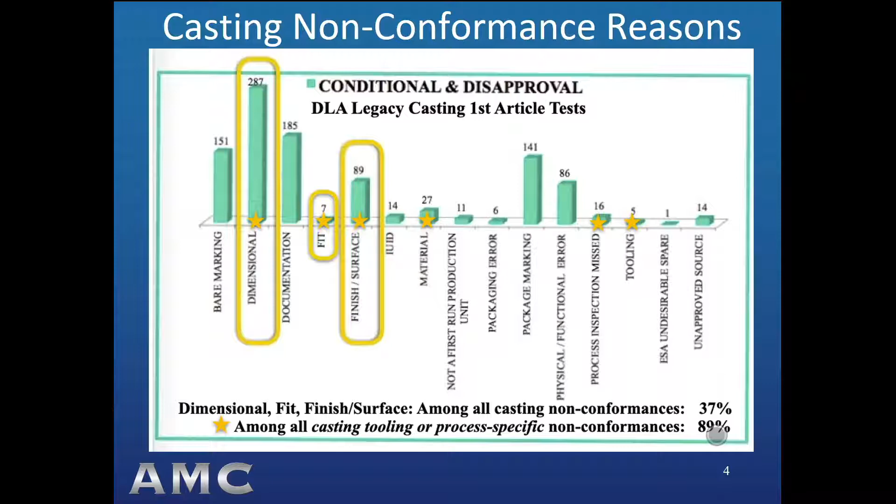Let's investigate why. The major and most difficult to solve problem in making casting dimensions comply with tolerance specification is the phenomenon I call pattern maker's contraction, commonly referred to in metal casting jargon as the shrink rule. When materials solidify from liquid, most of them, including all metals, form a crystal structure that's smaller in volume than the atomic arrangement in the liquid.

This is different from solidification shrinkage, so that's why I prefer to call the phenomenon pattern maker's contraction to avoid confusion in terms. Interestingly, ice expands to a larger crystal structure than the atoms of liquid water, and that's why ice cubes push up out of the ice cube tray and are larger. Well, the opposite phenomenon occurs with metals in casting molds. The metal wants to get smaller and the mold pushes back.

As the crystal structure is formed, the dimensions get smaller, pulling away from mold walls and often causing distortion as the mold pushes back in local areas. So the consequences of shortening dimension lengths is difficult to predict, but it gets worse.

This is research done in our American Metal Casting Consortium, funded by the Defense Logistics Agency and conducted by Penn State.

What we see here is the contraction rate based on feature length on the x-axis. Just look at the variation from contraction, which we expect, to some expansion, which we wouldn't expect, but the overall nominal rate is 2.1% for carbon and low alloy steels, which is what these experiments were conducted for. But in this case, we actually got 1.6%.

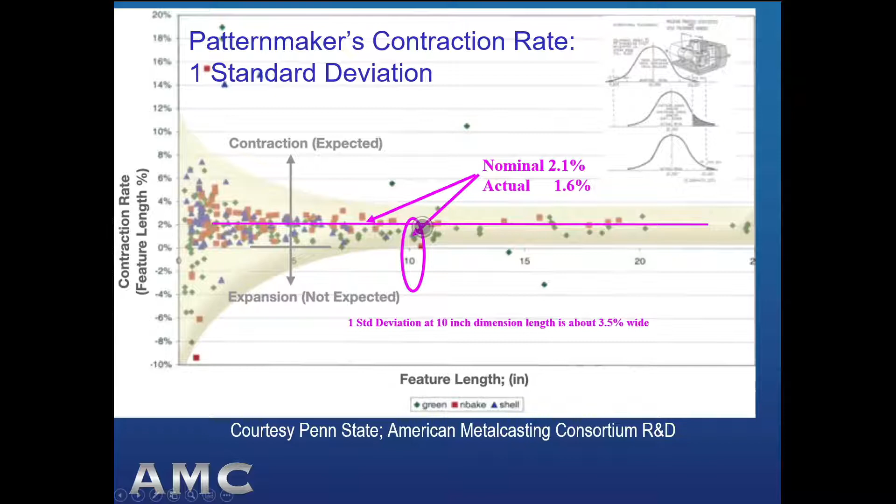So you can see that even as a longer dimension where the one standard deviation gets smaller, we still have significant variation. The consequence of this wide variation in pattern maker's contraction rate is difficulty in centering dimensions within their specified tolerance range. Here we have a 10-inch dimension, and the tooling was built for this casting.

We used an expected 2.1% pattern maker's contraction rate, but only got that 1.6% rate that I highlighted on the prior slide. So our process is capable of meeting the dimensional tolerance band specified, but our center of the dimension is off by the amount of the error in pattern maker's contraction estimate. Consequently, some of the castings are outside of specification, not because the process wasn't capable, but because the dimension wasn't centered, because we missed our pattern maker's contraction guess.

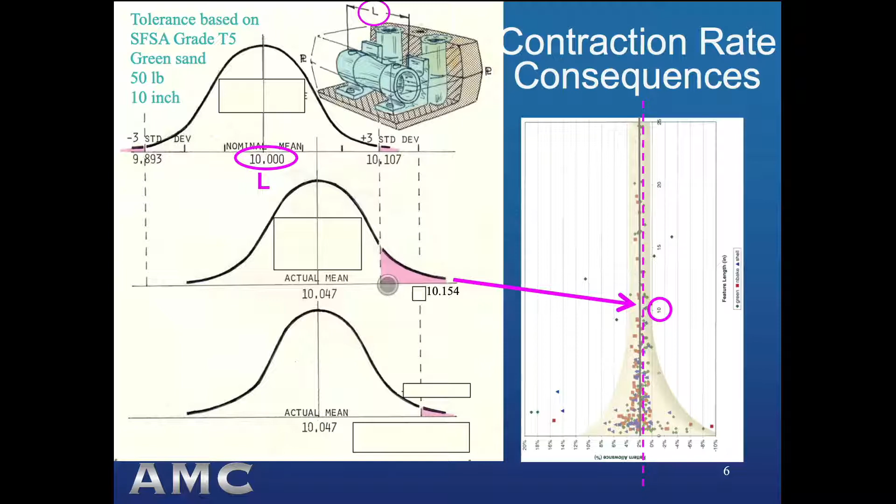So pattern maker's contraction rate is a guess made by the mold cavity tooling builder, and the data shows why that guess is problematic, and why dimensions are so difficult to achieve correctly in the first article inspection. But that data with all the variation was just for one metal alloy family, the carbon and low alloy steels.

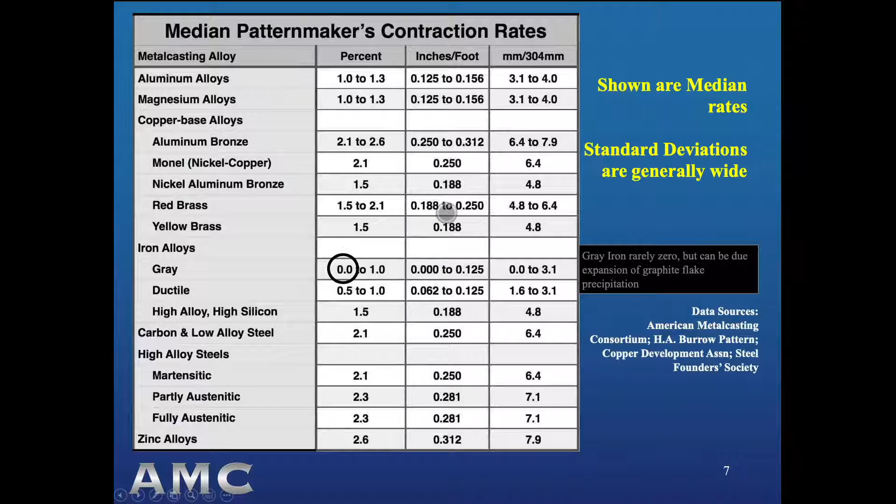Look here at all of the many metal casting alloys, and look at the difference in the center column, which is the standard parameter, inches per foot of contraction, and just look how much the median rate for each of these alloys differs. When I was making castings, here's a chart that I used to help me and my mold cavity tooling builder collaboratively make better pattern maker's contraction rate guesses.

If we missed, we missed. We would have to fix the tooling and make new prototype castings to see if we did fix it, but we tried, and at least we thought about it carefully.

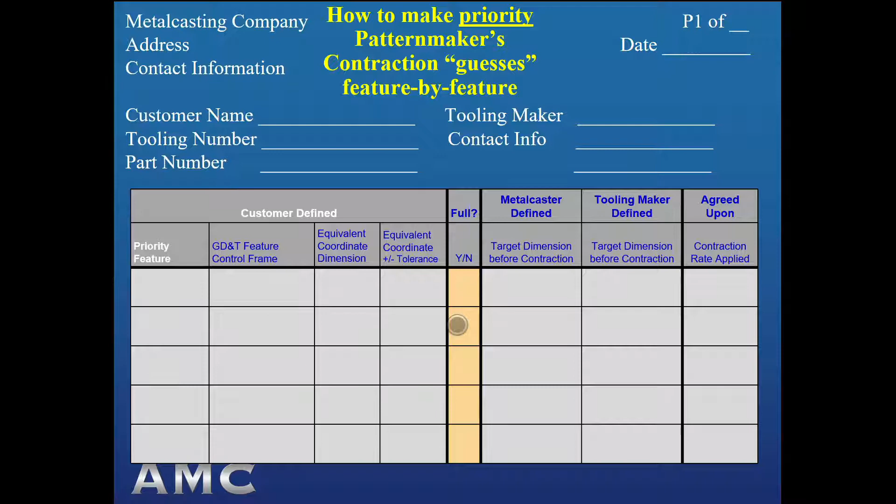Now look at this center column labeled full, marked in light orange. Full means that after we chose the contraction rate, we built the tooling on the large side of the dimensional range. For risky dimensions, that meant that when we missed the contraction rate, which we sometimes would, all we had to do was remove some tooling material to fix it. With metal tooling especially, having to add small amounts of material to the tool is a disaster for tool life.

The next most significant variable in the control of dimensional tolerances, but much more controllable, is mold degrees of freedom - in other words, freedom of movement in the assembly of the mold cavity. Most casting molds are assemblies of mold halves, cores, chills, and perhaps printed mold elements from additive manufacturing, but not all molds. Some are close to monolithic, most notably investment castings and sometimes die castings and lost foam castings.

As we will see in an upcoming slide, even those mold cavity making processes can have degrees of freedom that affect dimensions, but not as much freedom relatively speaking. Here we see a typical situation in a horizontally parted sand mold.

Encircled is a tall core that is set in the bottom half of the mold. It has 2 degrees of freedom in the green horizontal box. It has a core-to-mold degree of freedom as that core sits in the bottom half of the mold, and it has a degree of freedom across the mold parting line as it goes across that parting line and connects with the top half of the mold.

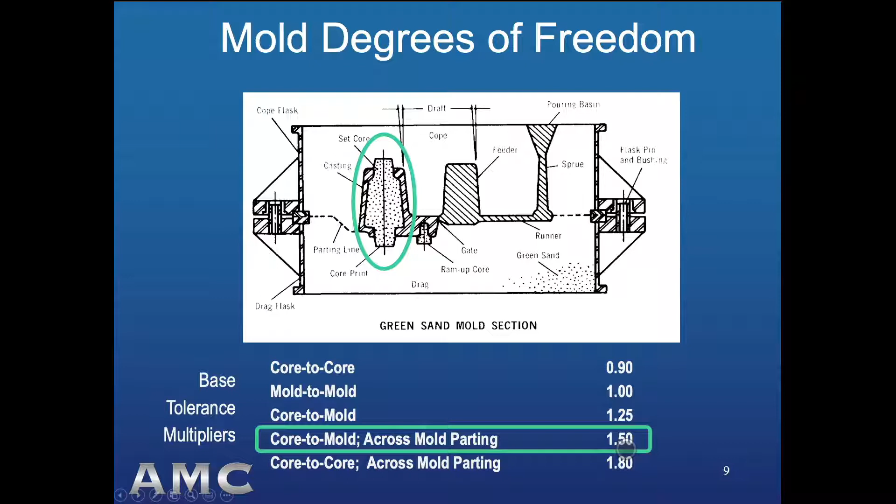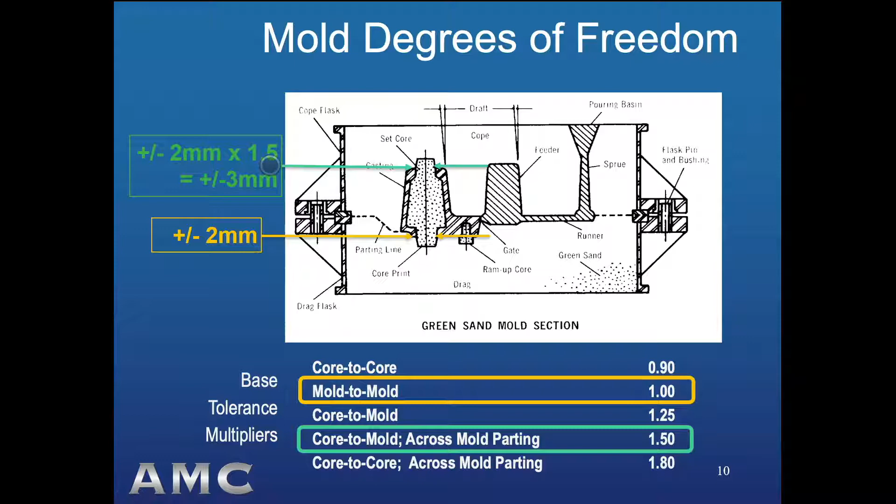The consequence of the variation in the mold assembly results in a tolerance coarsening of 150%, or 1.5 times the base tolerance, of the features formed in the top half of the mold only. So if the tolerance for the hole formed in the bottom of the tall core is plus or minus 2 millimeters, then the tolerance for the hole formed at the top of the core is 1.5 times that base tolerance, or it becomes plus or minus 3 millimeters.

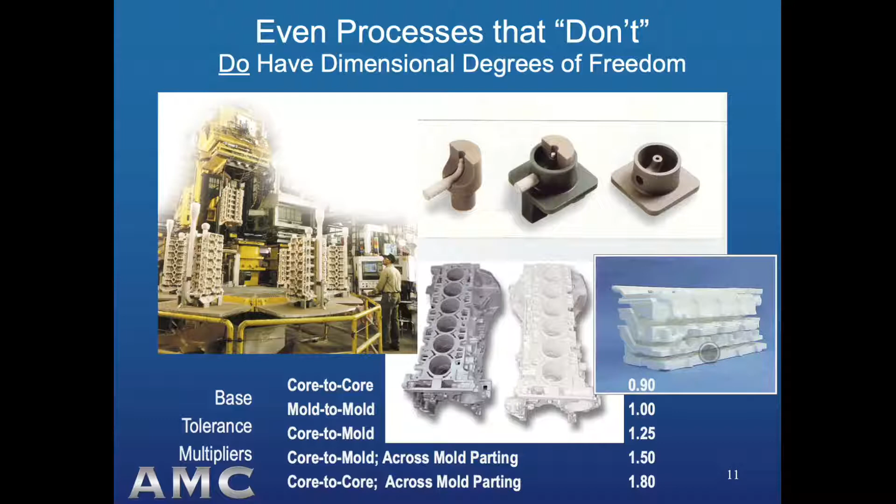In the lost foam process, an assembly of styrofoam patterns stacked vertically creates the entire geometry of the block, and there are registration issues and gap issues in the assembly of the styrofoam layers. So even the most accurate processes do have degrees of freedom, just on a more limited basis.

The idea of draft is most easily visualized as a cupcake in a cupcake baking pan. If the pan doesn't have slanted sides in the cupcake pockets, the cupcake can't be removed from the pan. Since baked cupcakes don't have much tensile strength, too much pull on the cake will break it. So that slant in the pan pockets largely enables release from the pan with little force needed to get the cake to release from the pocket's side surfaces.

Pulling mold cavity elements out of tooling to form casting molds is the same. Some materials like wax are slick and relatively strong, so the slant can be small. Other materials like green sand are not very strong against a pull, so the slant has to be much larger. And getting a solidified casting out of a metal mold requires a much larger slant. That slant is commonly expressed as an angle known as draft. For the metal casting processes and their tooling types, that angle commonly varies from half a degree to 3 degrees, and in some cases can be as large as 5 degrees.

Standard practice in specifying draft in casting designs is to define it as the draft angle. But that angle, which seems appropriate enough, causes first article approval problems all by itself. Let me explain why. Here we see an as-cast surface on the left end of a casting that has two molded parting plane options. One option has the casting split through the center, and the draft angle creates an offset that is the same on each side of the casting end feature.

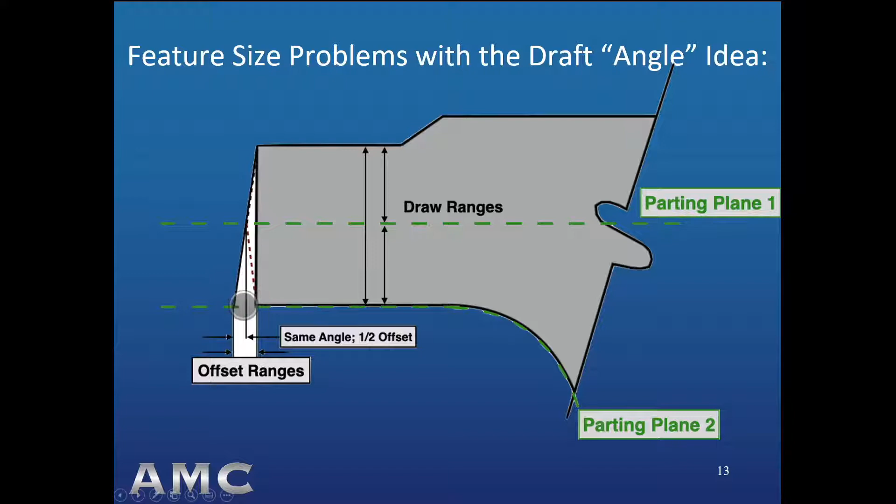The second option has the parting plane following the bottom surface of the casting. The same draft angle now creates an offset that is twice as large as the offset created by parting plane option 1. As a consequence, the large offset may cause problems with the dimensional tolerance profile of the casting's left end tolerance. Next, we see another draft option that can cause a first article nonconformance issue.

Parting plane option 2 creates two different draft draw lengths. In order to make the left end feature have the same size at the top and the bottom, the draft angle maximum is violated. That angle maximum violation may be called out as a dimensional nonconformance in the first article test.

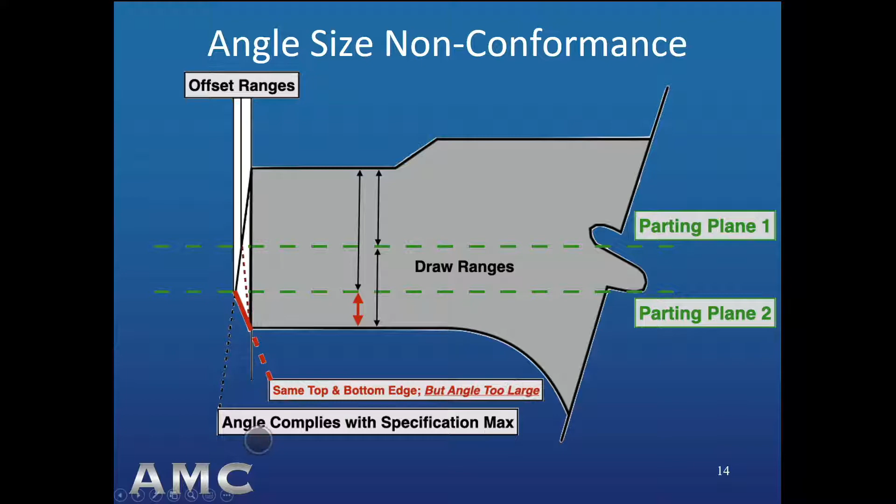Here is a real DLA casting that suffered a first article test nonconformance involving draft. It is an aluminum structural casting for the T-38 airframe. In the next slide, the allowable 2-degree draft is shown in dark pink, resulting in the bottom of the end feature being out of tolerance on the left side. On the front of the casting, the same amount of draft offset causes a low dogleg feature to be out of tolerance on the short side.

The summary of draft angle versus draft offset and draft draw length concludes our discussion of the reasons for dimensional nonconformances in first article inspections. You will recall that the major cause of first article nonconformances in DLA's study of all causes was surface finish.

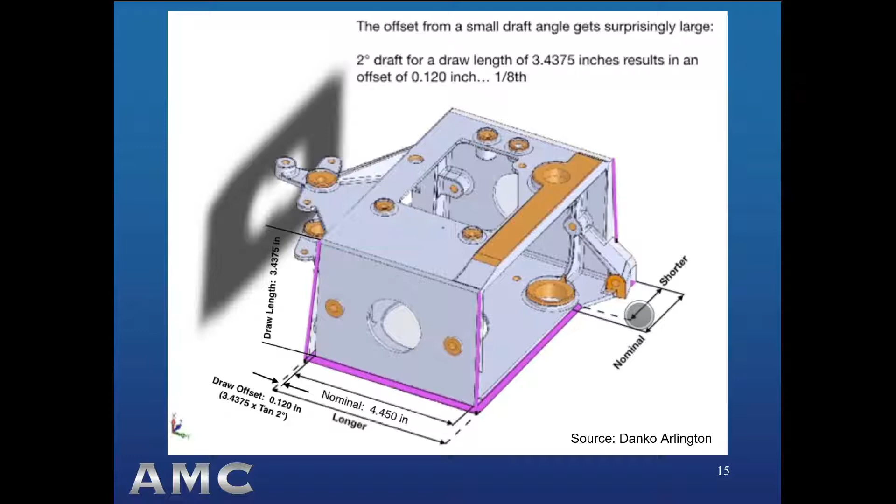Together with dimensional issues, surface finish inconsistencies are the other major contributor to the 89% of all casting-related first article nonconformances. Here's Mike again to explain surface finish.

We've now seen the factors that complicate dimensional tolerance compliance in first article inspection, but now let's look at the other major cause of casting nonconformances, which is surface finish. Surface finish, along with dimensional tolerances, compose 37% of all casting nonconformances in that DLA Pareto chart, and 89% of the nonconformances that are specific to the casting processes and the casting tooling. So first of all, let's look at how surface finish should be measured.

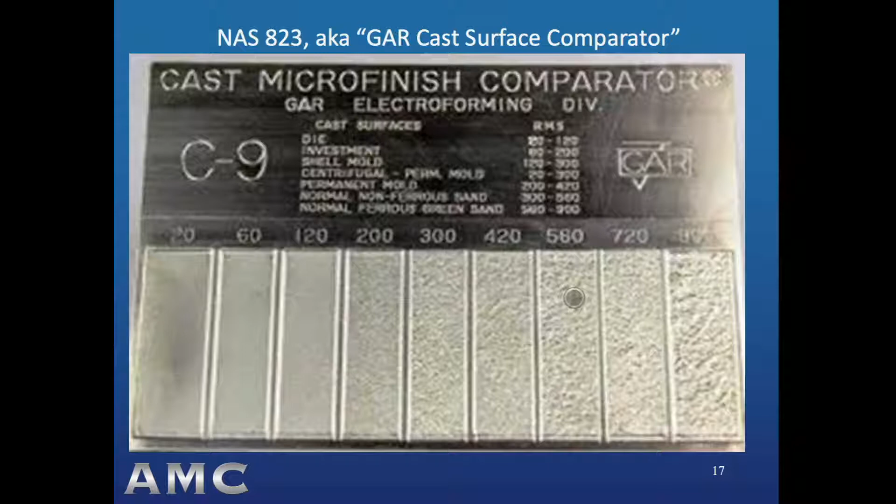This is the National Aerospace Standard 823, also known as the GAR Cast Surface Comparator. Basically, these surfaces are replicas of actual casting surfaces. This is the best way to evaluate a casting surface because you can hold the plate up against the light at different angles, touch it, touch the casting, and make a visual and tactile comparison of surface finish most effectively this way.

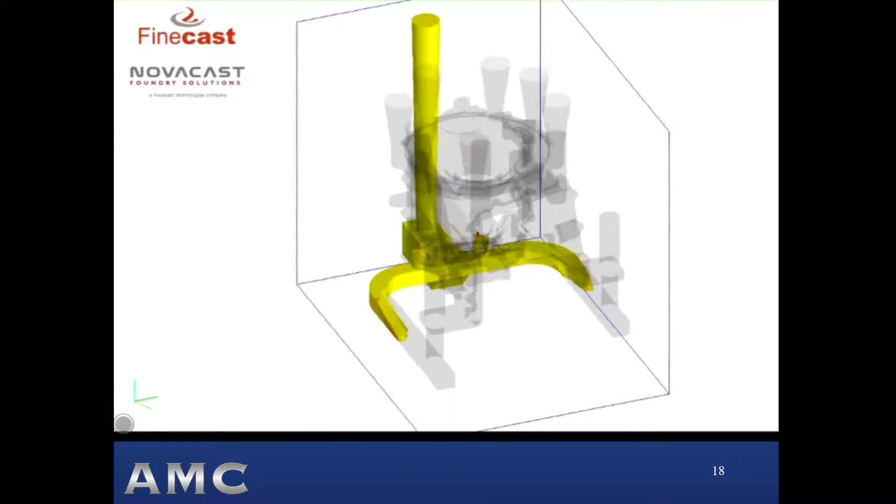Well, what then complicates the surface finish if that's all there is to it? Here is the reason. Here is a mold filling. This is an aluminum automotive casting in a safety critical application, and it is being filled as it really occurs in the mold.

So what we're seeing now is the mold cavity being filled, and you're seeing attachments to the mold cavity that enable the filling of the mold and also to feed solidification shrinkage to achieve the mechanical properties that are specified. So all of these attachments from the mold filling system, from the risers which feed solidification shrinkage, and even some surfaces like this may have a chill against it to help it solidify quicker.

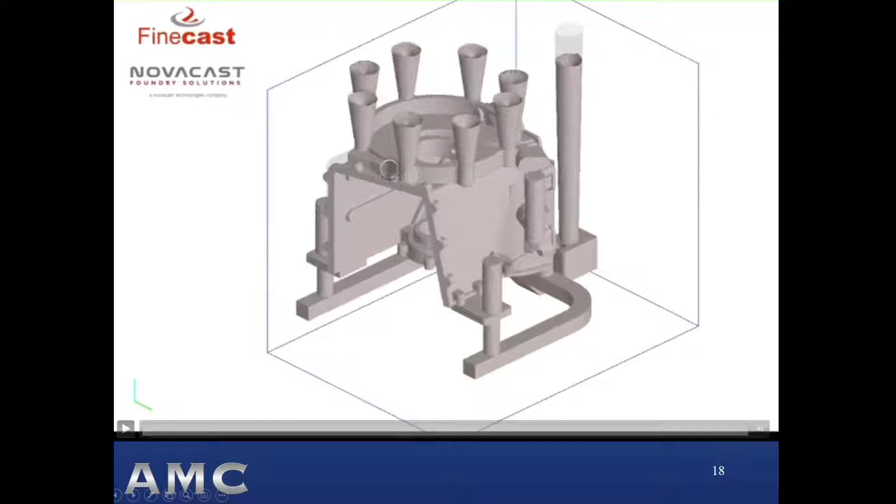All of those surfaces aren't like the surface comparator that we just looked at. These surfaces are actually cut away by a cutting operation of one kind or another, depending on the alloy. Then it is lightly ground to try to replicate this circular profile, and then media blasted to try to make the grinding marks go away and look like the as-cast surface as much as possible.

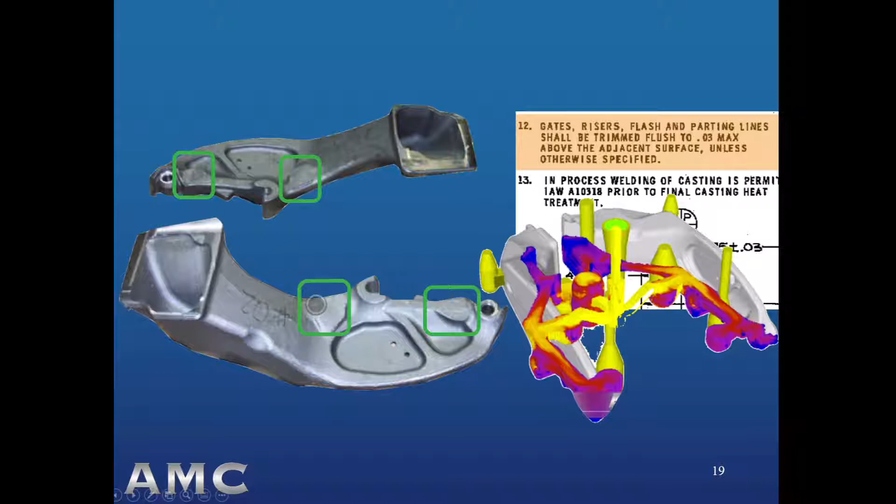As we have seen, all castings have surface anomalies from process interface geometry. That is, the gate, riser, chill, and vent attachments that have been cut off. The remaining stubs are ground down by hand to match the adjacent as-cast mold cavity surface finish as closely as possible, and then the casting is media blasted to smooth out the grinding marks.

The same surface treatment process is applied to another cause of casting surface anomalies. This cause is in-process weld rework, a normal finishing process on any weldable metal casting alloy. In-process weld rework is a normal consequence of liquid metal mold filling, solidification surface imperfections, or finishing handling.

Most common anomalies from pouring and solidifying are non-metallic inclusions and incomplete edges on fine corners of the casting geometry, as we see here. Casting finishing processes cause surface anomalies too. Most common in finishing processes are the dents and dings from handling, overgrinds, and small quench cracks from heat treating.

Extremely shallow surface anomalies are often blended away by hand grinding, leaving a very shallow minus metal profile on the casting surface.

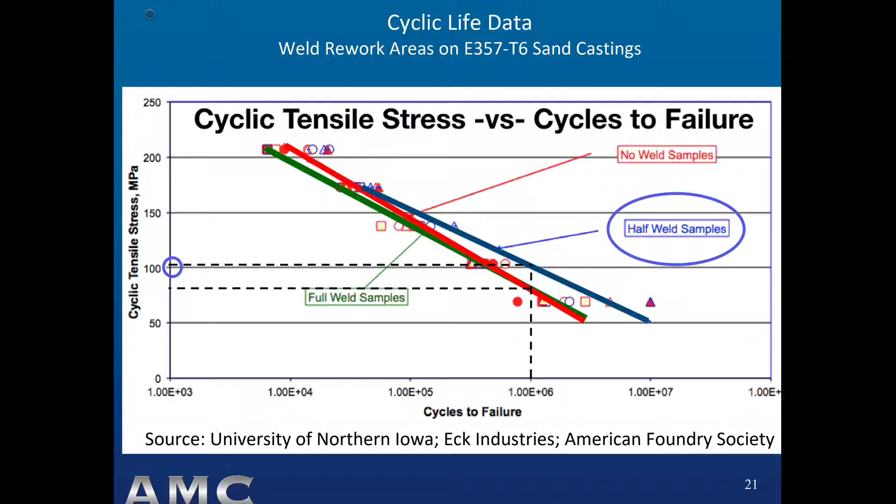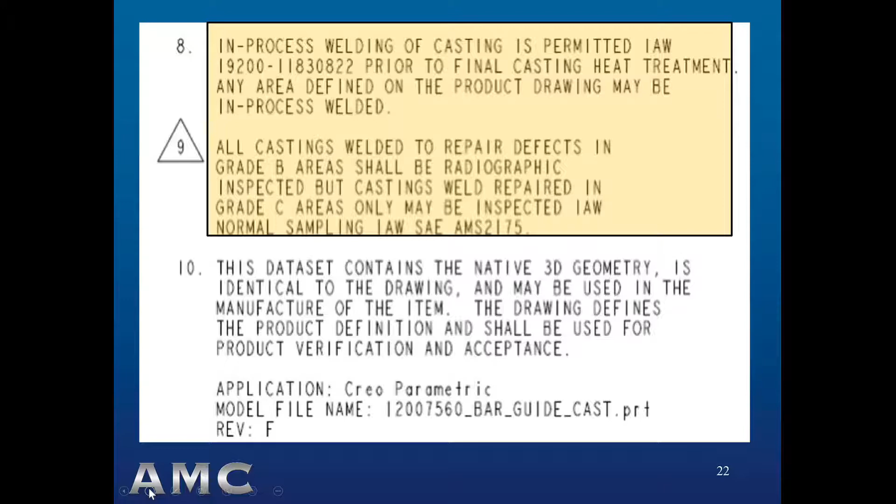Here's a well-crafted drawing note specifically allowing in-process weld rework and differentiating grade B and grade C solidification areas in accordance with AMS 2175.

Keith is based at the Defense Logistics Agency's Aviation Supply Center in Richmond, Virginia. Keith supports CASTED efforts from inside DLA as a graduate materials engineer, with a career in the Navy specializing in jet engine materials and components.

Keith will give us an overview of the roles of the 4 who's involved in the preparation and inspection of DLA legacy casting first articles.

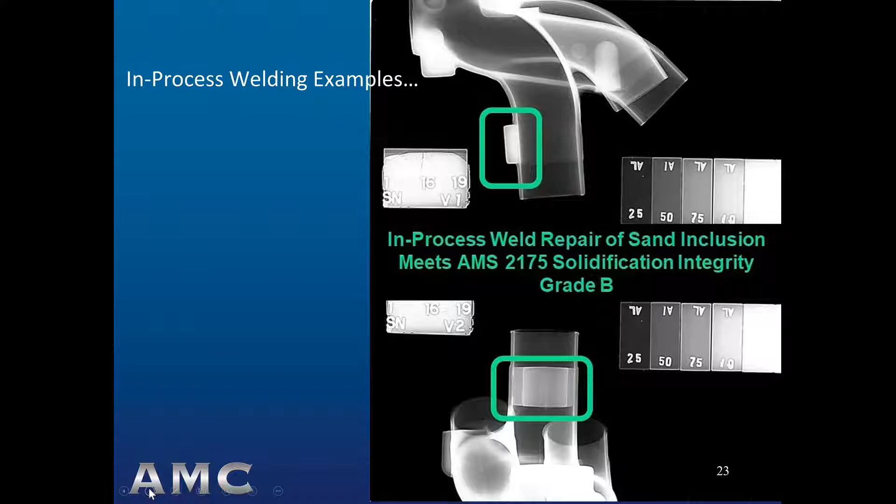Here's Keith. As Mike has said, there are 4 who's in the production, inspection, and approval of DLA Cold Start legacy casting procurements. As an overview and as a notional estimate using the 80-20 rule, here are the relative responsibility percents for casting quality of the 4 who's that Mike talked about.

First, the Cold Start new awardee has about 80% of the responsibility. Second, the first article inspection lab has about 10%. Third, the engineering support activity about 7%. And then lastly, the Defense Contract Management Agency has about 3%.

In addition to having the most responsibility by far, the Cold Start new awardee is typically a team of suppliers, frankly, in both the private and military/aerospace sectors. The recipient of a purchase order or a contract typically doesn't think of their business as a member of a team of businesses.

70 years ago, when manufacturing businesses were vertically integrated, one company had the breadth and depth of talent, resources, and plant equipment to manufacture complex engineered components, complete and in-house. Occasionally, a metal caster will encompass all necessary processes, but it is now rare. Today, the integrated result is normally accomplished cooperatively by separate manufacturing businesses.

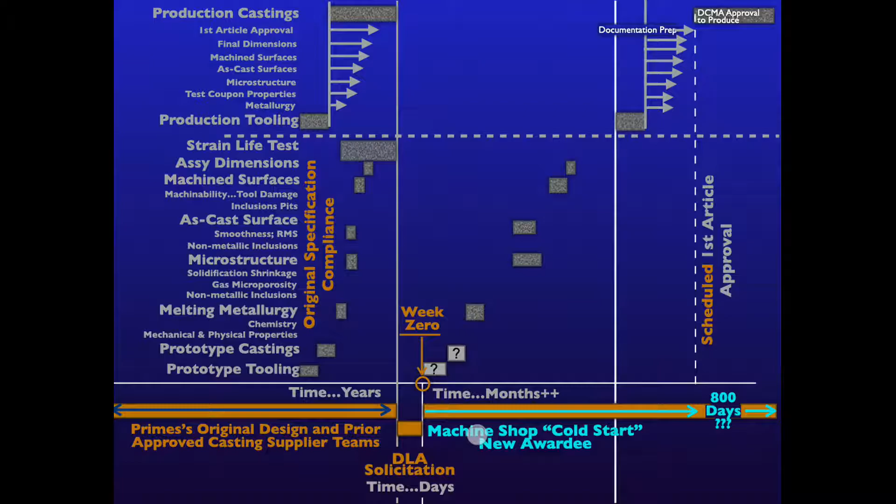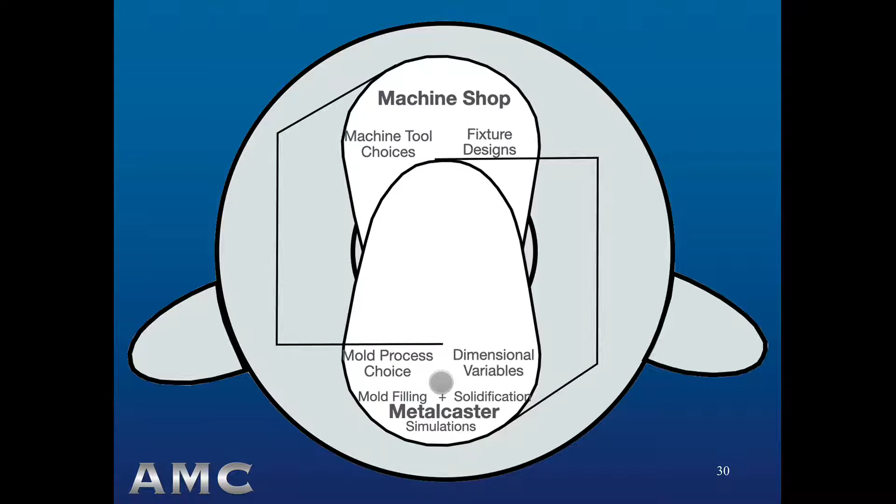We'll assume that the Cold Start New contract awardee is the machine shop. It might also be the metal caster, as it traditionally has been, but now most likely is the machine shop. In the middle is the mold cavity tooling builder, who will collaborate with both the machine shop and the metal caster, whether it be intentional or not, whether it be integrated or not, but it should be both.

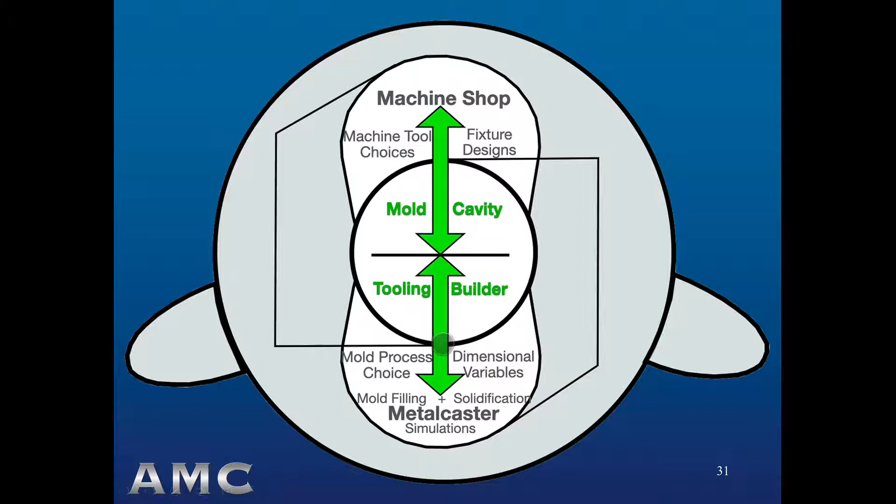Well, where are the other two? The heat treater and the coater are around the perimeter because they might be part of the metal caster's vertical integration. In other words, many metal casters have their own heat treat facility, and sometimes they have their own coating capability. In that case, there are only three in the center.

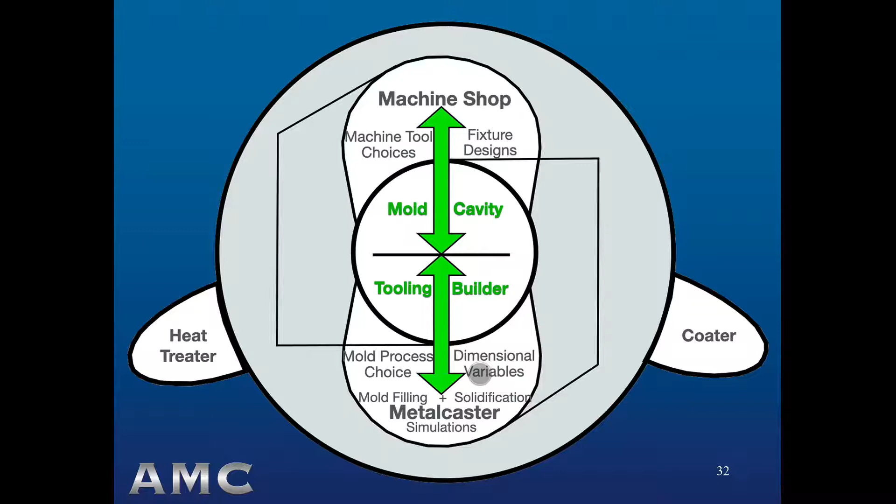Cooperating business partners—here are the roles that all of the big three play. The machine shop makes the machine tool choices and makes the fixture designs to get from as-cast to a final net shape. The metal caster makes the mold process choice, deals with the dimensional variables in the design and construction of the tooling, the choice of the mold process integrated together, and does mold filling and solidification simulations.

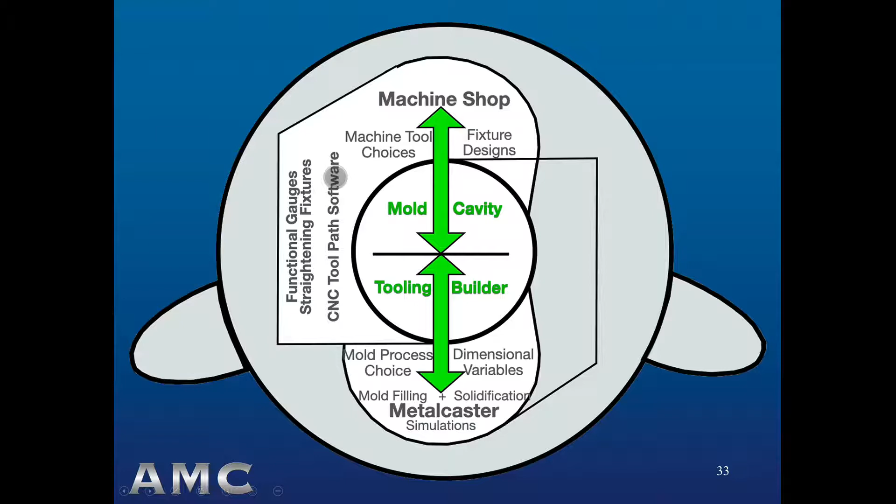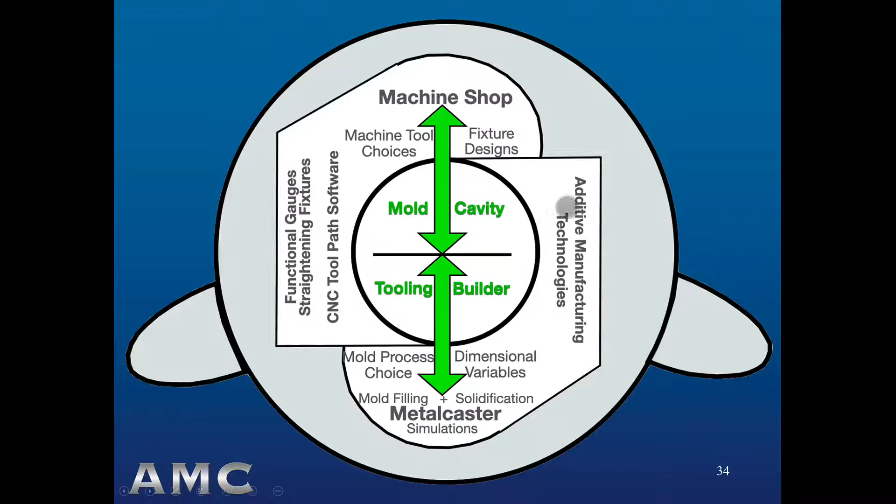The mold cavity tooling builder is involved in the functional gauges and straightening fixtures that usually are part of the metal caster's finishing process. They also do the CNC toolpath software to actually create the mold cavity tooling, and have additive manufacturing technologies either in-house or among partners. But there's another significant capability that the mold cavity tooling builder has that's unique.

It's the mold cavity tooling builder that builds the solid models that we talked about before—first the solid model from the 2D drawing, if it's a legacy casting with a TDP package that is old and doesn't have a solid model, which is typical. They have all the software expertise to make the solid models, not only of the 2D drawing conversion, but also to add draft, the mold parting planes, the match planes between cores and slides and assemblies of the mold cavity, and the draft. They also have expertise in geometric dimensioning and tolerancing, and access to know-how applied to the three versions of the solid model.

Well, Gary Burrow, who spoke to you about draft, is one of these mold cavity tooling builders. And the green areas are so significant, it's our recommendation that regardless of who holds the contract for the Cold Start New award, whether it be the machine shop most likely, or the metal caster, it's the mold cavity tooling builder that should be the technical lead of the intentional collaboration to make the manufacturing engineering happen successfully.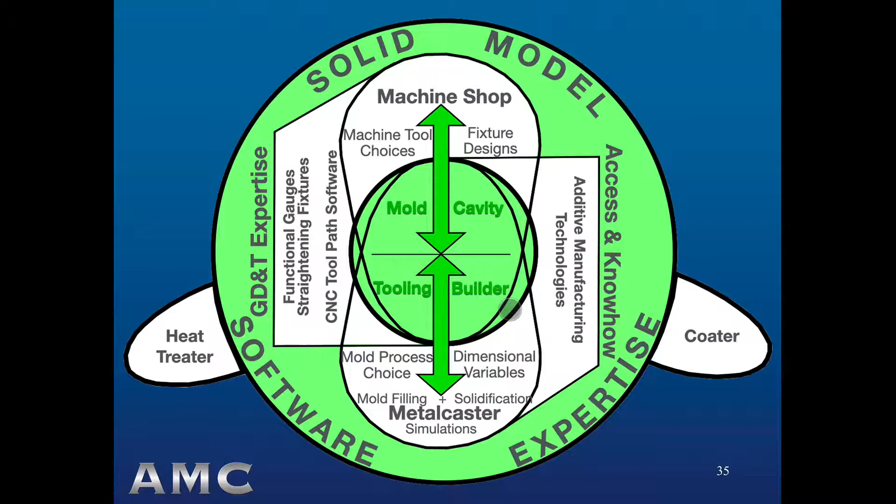Well, Gary is one of those guys, and here's Gary to explain how he does this. Over the 4 generations of the Burrow family in the mold cavity tooling design and construction business, we've cultivated individual relationships with a variety of metal casters serving the Southern California commercial, defense, and aerospace industries. Given that variety of casting and uses, we developed a wide spectrum of expertise in mold cavity making processes and alloy families. Now I have a national presence as a technical lead in the metal casting supplier teams that I serve.

Having established that expertise as technical lead, I frequently take turnkey responsibility as the contract or purchase order holder for delivery of finished castings, including DLA cold start legacy systems. As Mike was describing the roles and abilities of the 5 primary business partners of a metal casting supplier team, those areas he highlighted in green are what I do.

In my turnkey role, being responsible for delivery of finished castings, here's a list of what I do in collaboration with my metal caster, machine shop, heat treater, and coater partners.

Initially, during the bidding process, I make source selection based on the requirements of the finished casting, including the best mold cavity making processes based on the dimensional, surface, finish, and solidification integrity required in the finished casting specifications. What additive manufacturing technologies could augment the mold cavity making processes, either in direct printing of tooling elements or direct printing of mold cavity elements in natural sands, ceramic sands, or ceramics.

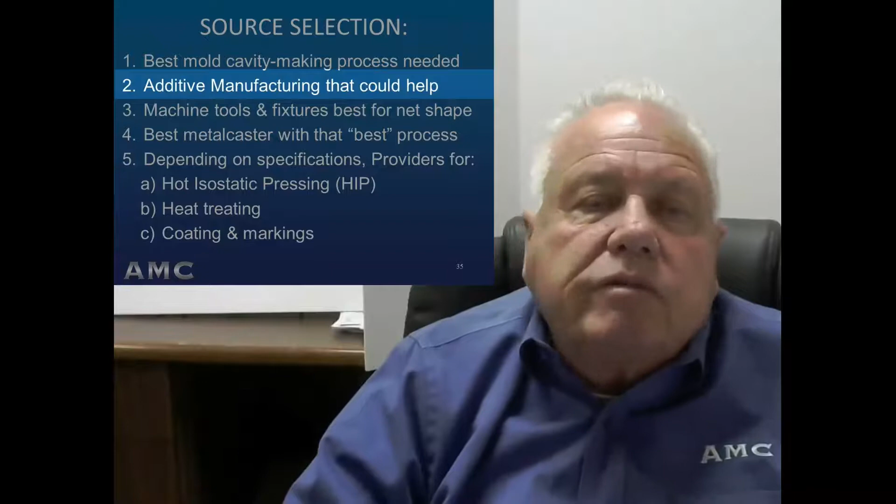Even metal mold elements, or chills. The type of machine tools and fixturing approaches required to convert some as-cast surfaces to finished machine surfaces and fabricating the casting into other finished geometries like threaded inserts, bolt-on, or welded-on other geometries.

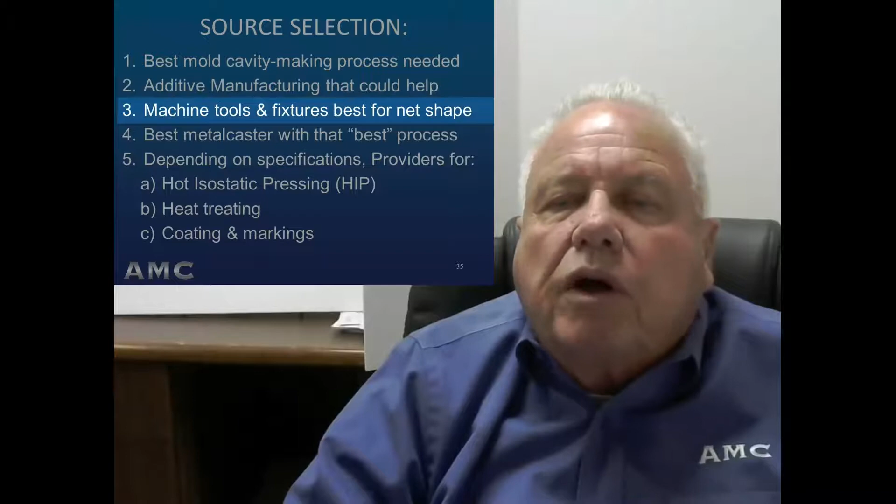The best metal caster nationally that is capable of producing the best casting using that mold cavity making process. Selecting a hot isostatic press or hipping press provider if the solidification integrity and dynamic property requirements are very high, beyond the capability of the chosen mold cavity making process.

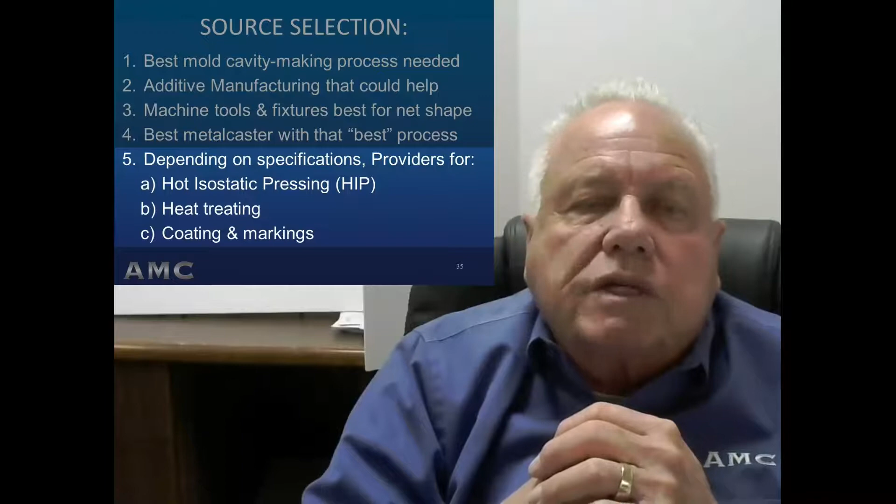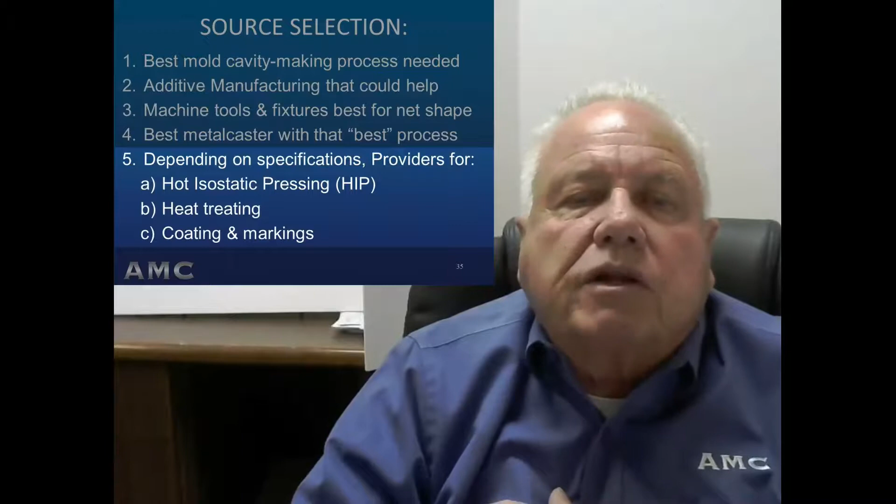The best heat treater based on the chemistry and microstructure of the chosen alloy and the probability of fixturing for heat treat and or fixturing for straightening afterwards. The coater based on the chemistry and processes of any specified coating, including markings.

Whether I wind up being turnkey source or the technical lead as a collaborating partner in a metal casting supply team, here's what I do in those green areas of the manufacturing engineering collaboration graphic.

If no solid model exists, we build a solid model of the as cast and or finished casting from the 2D drawing. Based on the manufacturing engineering collaboration with the metal caster and the machine shop, we build a modified solid model that adds the mold parting planes, mold draft, core to mold match lines, core print to mold match lines, core and core print drafts, chill prints and chill print draft, and connection surfaces for the in-gates, risers, and vents. This geometry is what defines the actual as-cast features of the casting as it is formed by the liquid metal.

As a preface to estimating the pattern maker's contraction rate for all of the manufacturing in the second model, I convert all of the GD&T tolerances of position and profile to old school plus minus coordinate tolerances. I do that because building tooling for the molding cavity has to be converted in plus minus, just as the dimensional capability of the mold making processes is necessarily expressed in the old school plus minus process.

To accommodate pattern maker's contraction, the second solid model's features are increased in size based on the alloy's pattern maker's contraction rate. The metal caster and I collaborate on what that normal rate should be, which varies substantially by alloy. It should be modified for each significant or critical dimension on the casting.

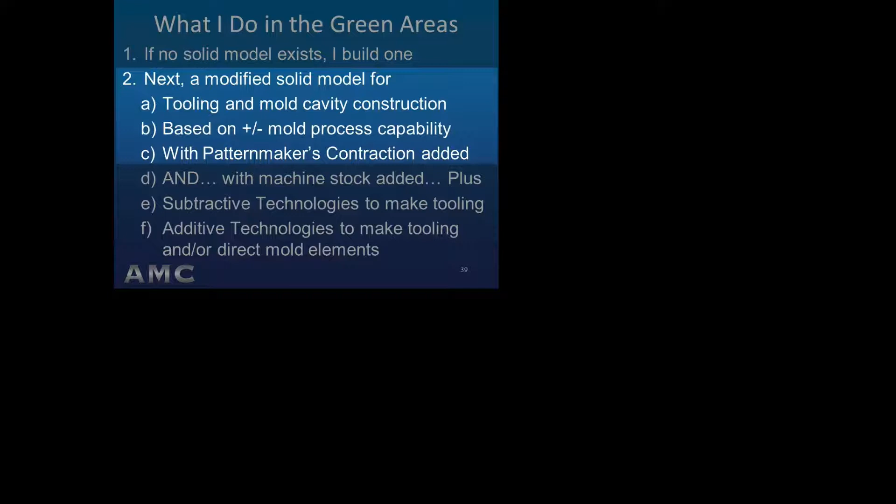Pattern maker's contraction rate is always a guess. Mold cavity builders always make the guess, but it is best to collaborate on guessing with the metal caster's experience included. Better guesses make fewer tooling adjustments to correct dimensional nonconformances later.

And along with the increased model size for pattern maker's contraction, if the net shape is to be upgraded by machining, we add machine stock to the cast surfaces that will require machining.

From the modified solid model, we use any of the following manufacturing technologies to create the tooling, tool elements, and direct printed mold cavity elements. Subtractive tool path geometry and CNC machine tools to form mold elements, core box cavities, and chill mold cavities. Subtractive or additive technologies to create cavities that become core boxes or molded pattern elements.

Additive technologies to make quick prototype sand molds or investment mold patterns. Additive technologies to make production printed investment patterns or printed sand or ceramic mold cavities for sand molds.

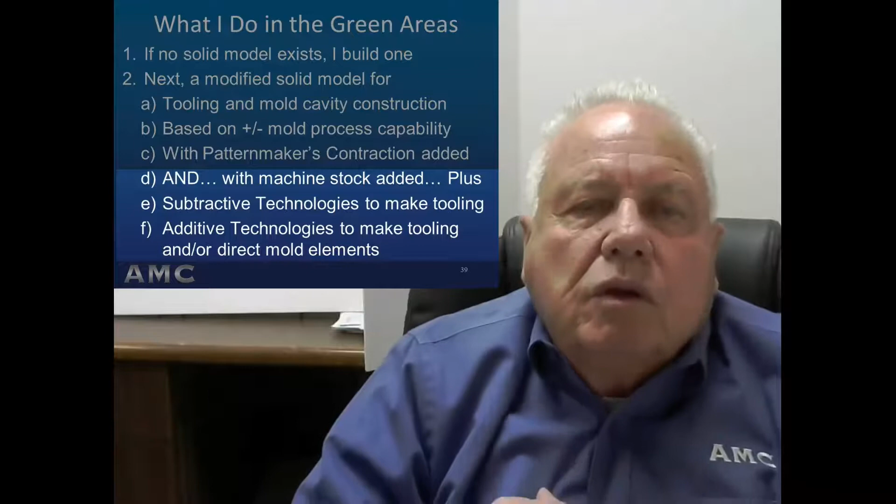We mold cavity tooling builders either have to have or have access to the additive manufacturing technologies needed. Some of the technologies are located at universities, AM providers, or AM service bureaus. Even direct printed sand mold elements are durable enough to be shipped to the metal caster's facility from AM sources around the country.

For the different fixtures that are needed for processing from the as-cast surfaces, we can produce a 3D solid model that removes the casting manufacturing features such as core and chill prints, leaving only the drafted surfaces with mold, parting, and core match lines, in-gates, risers, vents, etc.

We can then remove the pattern maker's contraction size increases. For building fixtures for processing as-cast surfaces, including heat treat and machining setup fixtures, this third solid model is a great asset.

Since I am responsible for the pattern maker's contraction estimates, which are at best educated guesses, I encourage the metal caster to make quick, unfinished prototype castings to see how significant and critical dimensions actually come out to be. I can help with versions of this production tooling made quickly for the prototyping from additive or subtractive manufacturing technology that I either have or have access to.

Not many of my mold cavity building peers take the initiative like I do to be the technical lead in integrated manufacturing engineering for first article approval success. But they do have the know-how and assets to collaborate. They just need to be asked and encouraged to make the technical leadership for everyone's benefit.